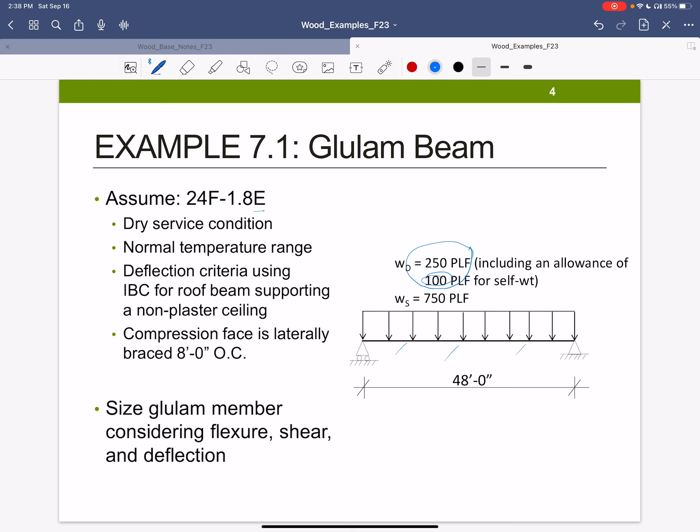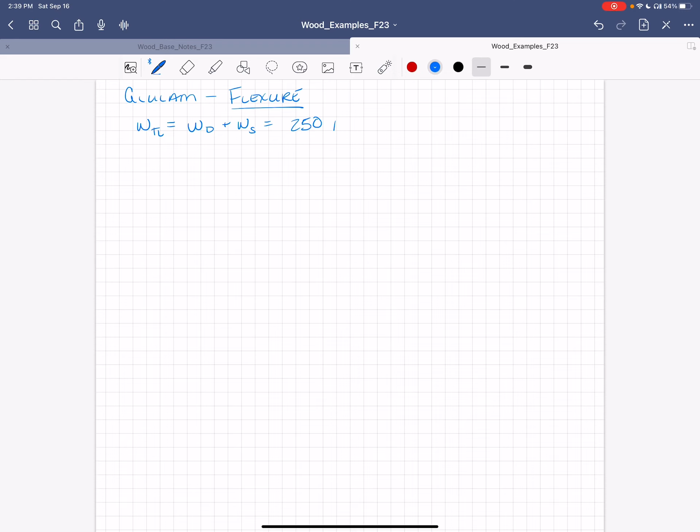So we're going to do the usual flexure, shear, and deflection, but this time we're going to use a glulam member. Oops. All right, so let's get started on this one. Glulam flexure example, and we'll look at the shear and deflection. All right, so our demand W, or W total load, is WD plus W snow, and it was 250 pounds per linear foot plus 750 pounds per linear foot for a nice round 1,000 pounds per linear foot.

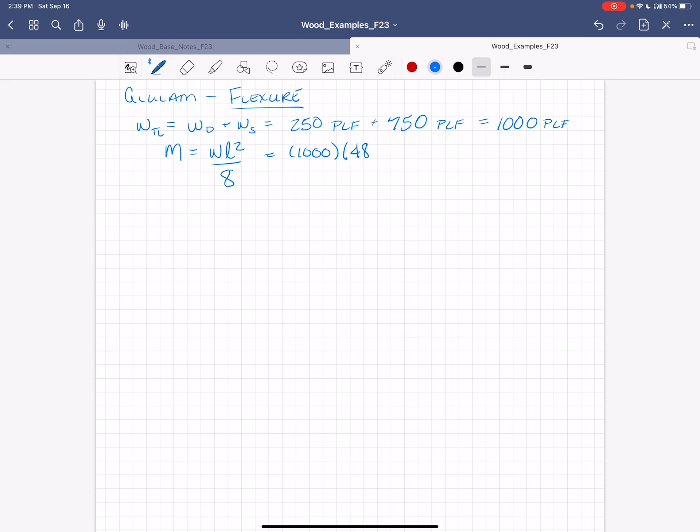Moment, the good old WL squared over 8. It's all uniform load, and it is a simply supported beam. So we'll get 1,000 pounds per linear foot, it's a 48-foot span, so a long span compared to what we've been doing, squared over 8, and we get 288 kip feet. We've been playing with pound feet in the sawn lumber, but now we're talking about a much longer span. This glulam is going to be a bunch of lumber pieces laminated together, and so we're now in kip feet. So this is looking more like some of the structural design you've done with other materials.

Okay, so f sub bx would be M over S sub X. But we don't know S sub X. We've got to choose the member size first. Right, that's the design problem here. So we know that we have to be less than what's allowed. So we're going to solve for S sub X, just like we did on the design sawn lumber problem. We'll follow the same process, but in glulams we're going to have this X piece because that designates which way the laminates are going, which way we're bending.

Same idea as before, but now we have to go to table 5.3.1 of the NDS code to find what C values we use for glulams here. In flexure, CD, CM, CT, CL, CV, CFU, C sub C, and C sub I. I missed one here. Yeah, C sub I.

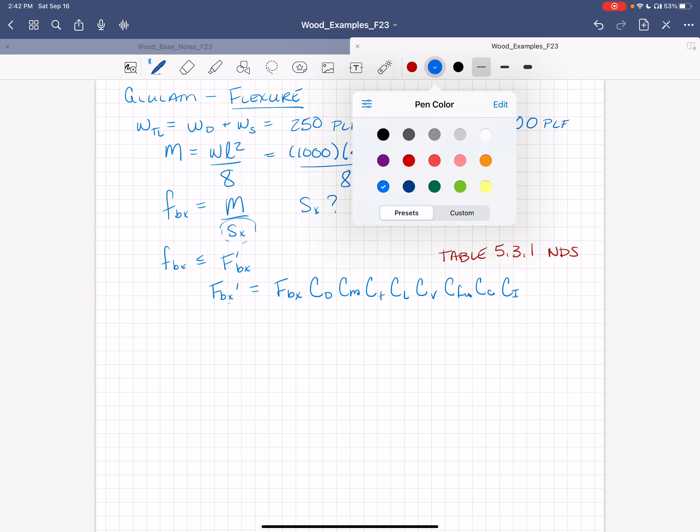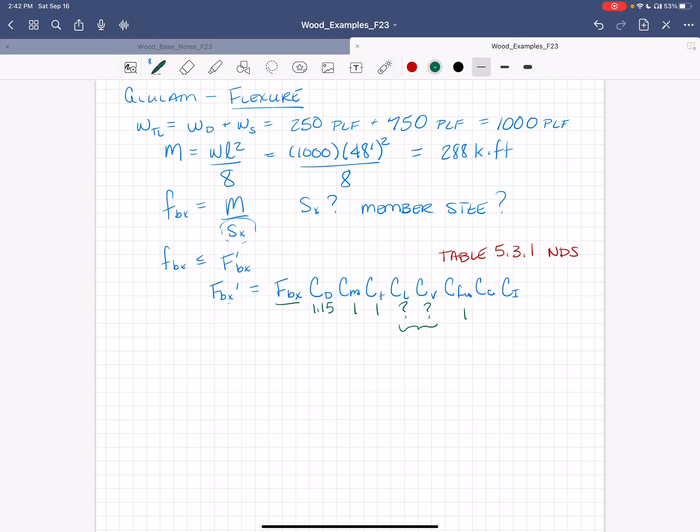All right, so if we go and look at this, I'm just going to switch up colors here. We're going to look up Fb in the table. A lot of these we've done before. C sub D is 1.15. CM is 1. CT, the temperature one, is 1. I don't know C sub L. I don't know C sub V. And remember these two, if you look in table 5.3.1, there's a footnote that says we don't apply those simultaneously. So we use the smaller of the two. We're going to have to figure out what those are and then use the smaller one. C sub fu 1, C sub c 1, C sub I 1.

All right, so what were the new ones here? Well, the ones we're going to have to deal with are C sub v, which is the volume factor. And we have C sub c, which is a curvature factor. We're not looking at curvature in this beam at all, so that's 1. C sub I is a stress interaction factor for tapering. And this means that when they make the thing, it's got a taper to it.

So we're not doing anything fancy with tapering here, so that one's also 1. All right. So what we've got to deal with is C sub L, which is the lateral stability one, and C sub V. So we use the smaller of those two guys, the lesser of those two. So how do we do this? Well, we don't know either one of them.

And this is not as straightforward, because in the sawn lumber chapter there's that 4.4.1 section that allows us to use some rules of thumb. This wasn't a case where it's continuously braced, so we don't have that out. So we've got the 8-foot on-center bracing, and we're going to have to figure out what C sub L is, and we don't know what C sub V is either, because that is a volume factor, and that means we have to know what the size of the thing is.

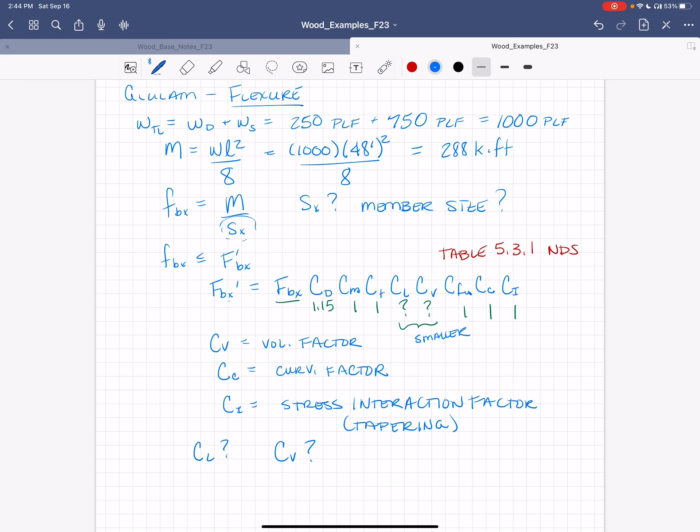So if you go in on page 37, or section 5.3.6, the volume factor is an equation, but we don't know what the member size is yet. So page 37 or 5.3.6 of the NDS has your volume factor.

And that equation is C sub V equals (21 over L, the length) to the 1 over x, times (12 over d) to the 1 over x. Sorry, I said that wrong the first time. And then (5.125 over b) to the 1 over x. So kind of messy, but not a hard equation. And the max that you can use there is 1.0.

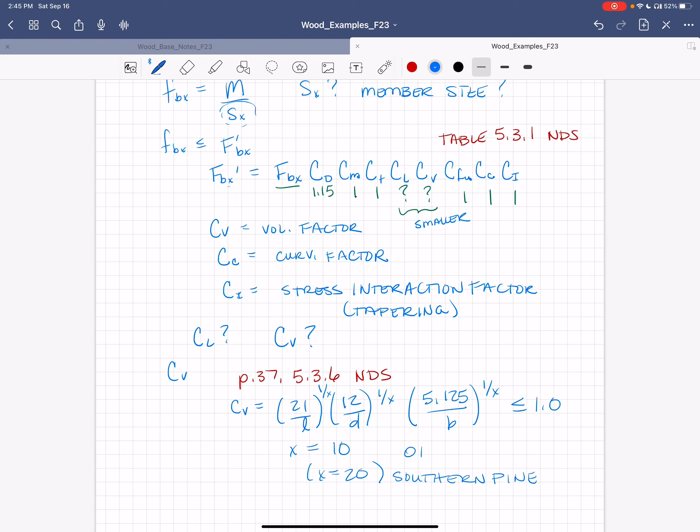In our case, x is 10. x is 20 if it's Southern Pine, and it didn't specify we had Southern Pine here for this example. Any other wood is 10. Okay, so we could make up a size. If we'd been doing a ton of glulam design in our office, we would probably have a really good idea where to start with this. My gut feel would be something around 0.8, but I went through this problem and it might look too suspicious, because the actual answer I came up with was pretty close to 0.8.

So we're going to use just a guess of C sub V based on, if you happen to have the wood book or have access to it, they do a similar problem here. And they just say, guess 0.82. Okay. Now, there's no description of why to guess 0.82. Typically, you'd have a feel for this. I would say you could throw in a dimension and see what you get. There's no good reason here that I'm guessing 0.82, other than that was the guess that was used in the example problem in the book.

You could use anything. I would say keep it between 0.75 and 1.0. It's probably a good start. And 0.8 sounded like something good to me. Anyway, this will depend. You may choose a different section size than I do, because there are several section sizes that are pretty good once we look in the glulam tables for this one. So let's just say we're going to guess this and move forward, knowing that it's just a guess and we can do whatever we want.

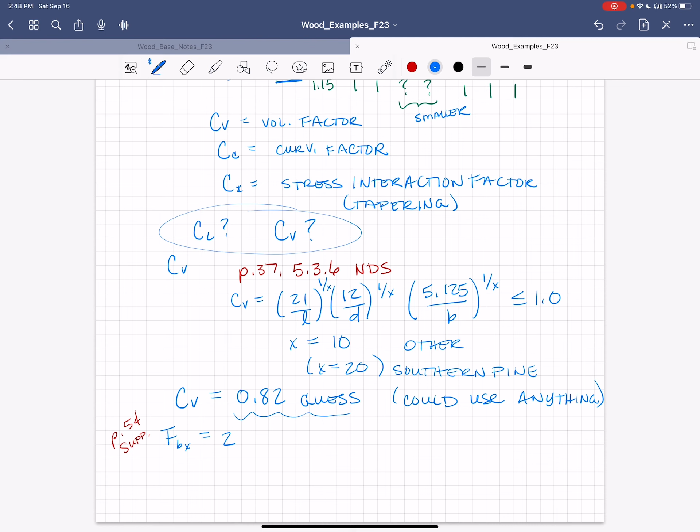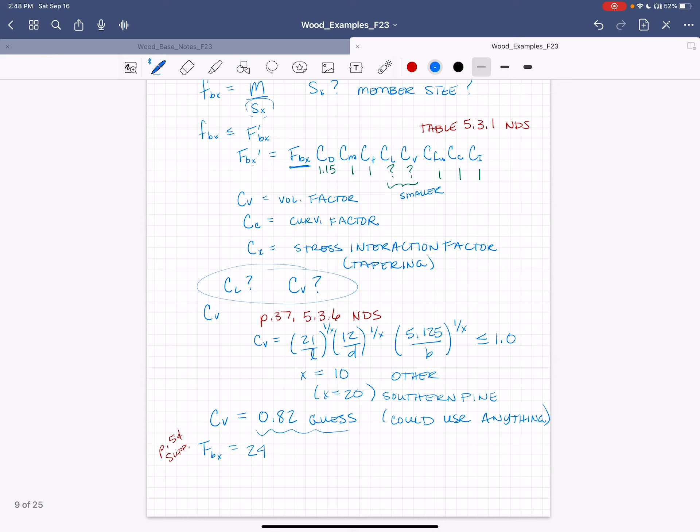F sub bx. So pause this video and go look up the things that I write in red, to make sure you see where it's coming from so it's not totally confusing. If you've got a hard copy of the NDS, I would go ahead and put your sticky tabs or whatever you want in there so that you can find this stuff easily. Okay. If I look this up, for the glulam beam that I was given, which was a 24F-1.8E, we know the 24F means it's 2400 psi, so I don't actually have to look that part up. But you can, and it'll show you in the table that that's what it is.

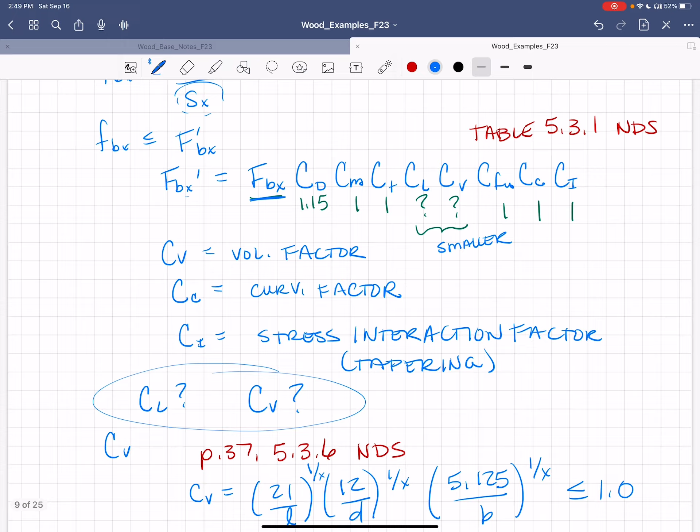Okay, let's go ahead and put in all the different C factors and get an answer here. So 1.15, 1, 1. We don't know yet what some of the other ones are. Let's put in this with 0.82. You remember when we were up here, basically everything is 1. We had a 1.15 here, and then we had our other guys. And the last three were also 1s. All right.

You don't have to put all the 1s in for your calculations. It does help to do that just as a double check so you don't drop one accidentally, especially if you're doing a problem with wood on, say, your licensing exam. That's where you will miss points. So make sure that you're catching all those C values. It's very, very easy to miss one of those.

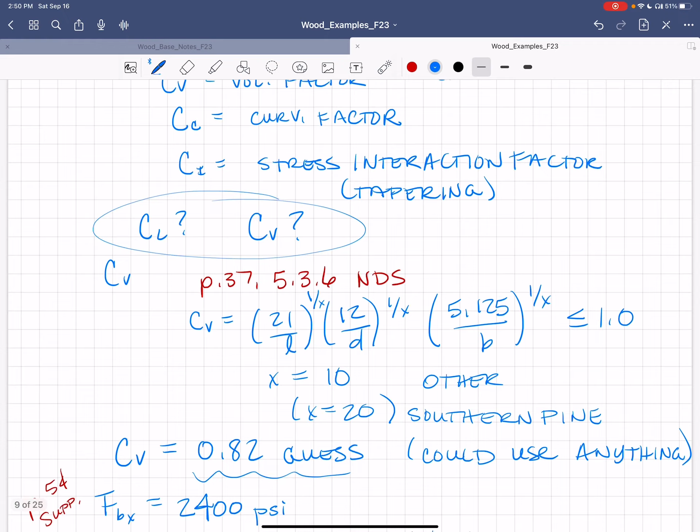So we need to find our little f sub b. 288 kip-feet is the moment, 12 inches per foot, 1,000 pounds per kip, and then I have S sub x. And the F sub B stress that I'll get here is, sorry, needed to write this down. I was talking so much, I forgot to write it down. 2263 psi is what we got for the F sub Bx times the C values. There we go. So we're going to take that equal to 2263.

So our stress equals moment over Sx so that we can find S sub x. Solve for S sub x and we get 1527 inches to the third. Now remember, this is just an estimate at this point because we assumed a CV value, and we haven't even found a C sub L value yet because we have to see what we get for section size and then check all those things. So at this point, go to table 1C, which are the section properties for the glulams, and take a look at a couple sections.

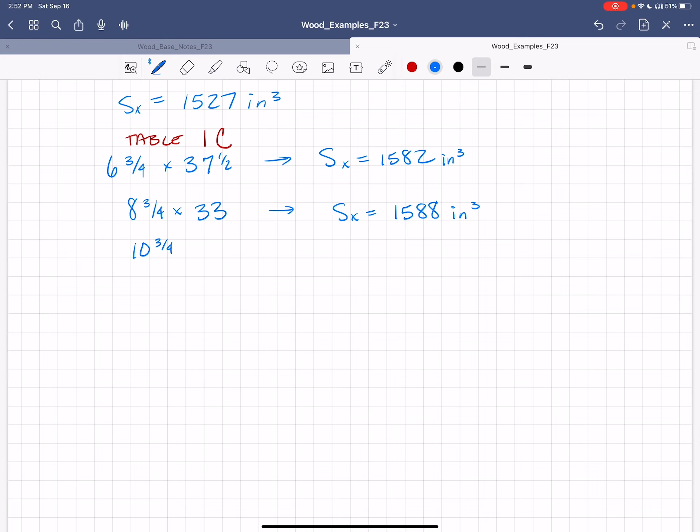So I'm just going to pull a couple out that would be at least 1527 for an Sx value. One is a 6 3/4 by 37.5, and that will give me an S value of 1582. There's an 8 3/4 by 33, and that one gives me 1588. Another one's 10 3/4 by 30, and that one gives me 1613 inches to the third.

Now, generally, I've got a little wiggle room here. I would try to get the lightest one. In this case, that's this one. It's not lightest because the S sub x is lightest, although that's true in this case too. It has the smallest area. The areas: this one's about 253, this one's about 289, and this one was about 323-ish. So the smallest one, right?

Because S is I over Y. And remember, depending on my shape and how far stuff is from the neutral axis, I could have an I value that's bigger with a smaller area. I just put this over here to remind you that's what is going on. These are all rectangular sections, so as long as I'm using basically the same kind of wood through the laminates, I would probably just go with the smallest S sub x value in this case. Doesn't really matter. Use one of the ones. We're gonna use this guy.

So if I try a 6 3/4 by 37.5 glulam, now we need to find actual C sub V, C sub L, and figure out which one's the smaller to control. Then we're going to be able to check flexure. So C sub V, we're going to use that equation now. 21 over L, 48, to the 1/10, 12 over 37.5 to the 1/10, and 5.125, this is the formula from the previous page, over 6.75. So now I have the dimensions to put in here, and I get

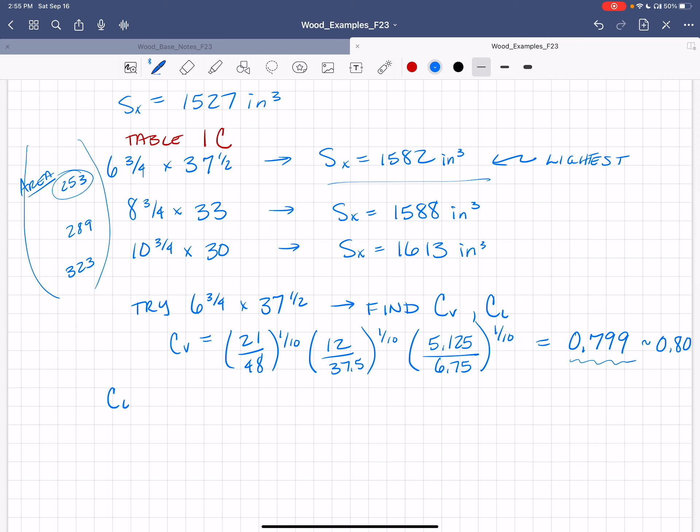But we don't necessarily know that that one controls, because now we have to calculate CL so that we can find out which one's smaller. Okay, CV is, or CL, sorry, the lateral bracing one for the glulam is not just one. This thing is not continuously braced, and it's braced only at 8 foot on center on the compression side. What we're going to have to do is use the formula from this section.

So go take a look at NDS, the code, 3.3.3, page 15 of the code, and just take a look at that whole section, because there's a number of formulas there. Let me look at that section real quick in my book too. Okay, so it says beam stability factor.

I have a hard time with the wood code when I haven't used it in a while, because in my brain, the commentary is the right-hand column. Remember, the commentary is in the back of the NDS, and all the columns are the code when you're up in the front of the NDS. So on the right column, you've got 3.3.3 beam stability factor. We don't have any of the simple cases here.

So what we need to do, if you turn the page, you'll see effective lengths. And our effective length, L sub E, we've got a single span uniformly distributed load. So we either use 2.06 times L sub U, or we use another factor. So if LU over D is less than 7, then we use 2.06 L sub U.

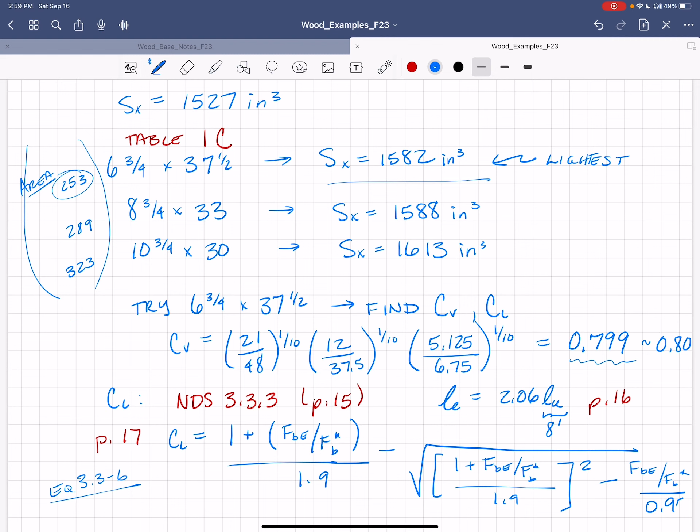Okay, sorry. So this same quantity, and this is raised to the 2, or in other words, squared, minus that same ratio over 0.95. Okay, so there's that equation. We got to figure out what these different things are.

In that same section, it tells you what F sub BE is. It's F sub little b capital E for modulus, basically, equals 1.2 times E prime min over R sub B squared. All right, so this gets a little cumbersome in here, but this is all in that same section, and you're just trying to find each of the values.

The E sub prime min, if you remember, we were talking about the E values when I went through the slides on the last lecture for this section on glulams. We use E sub min when we're looking at lateral stability, so that's why we use this one, and we're going to use E sub Y min, because this lateral stability is bending weak axis. Let me just show you that.

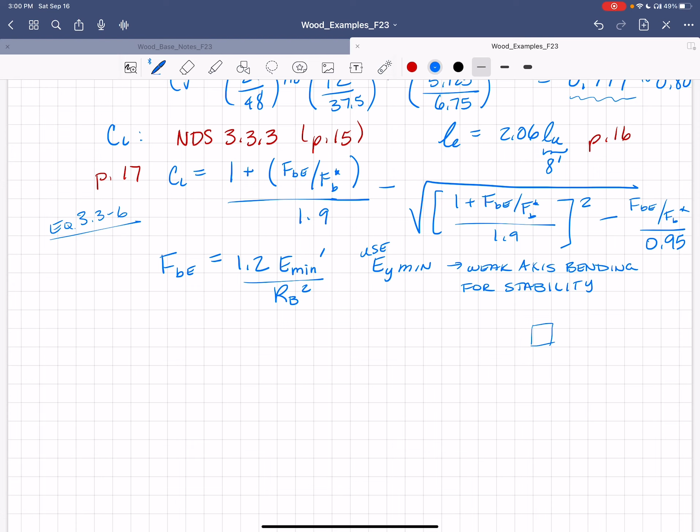This is when, if we were in class, I would get out the white I-beam that I carry around everywhere and bend it. But essentially, if this is my beam, right? If I look sideways at my beam, the normal bending that we're doing is this way, right? And we're bending about the strong axis. So it's up and down, right?

This way. When I'm talking about lateral stability, that's when it bends out of the bending plane. So that's the weak axis bending, right? Because that's the whole problem. If it's in strong axis bending, we're in good shape. If it starts to buckle out of plane, that's when things totally change, right? It's the same as in steel class. If you haven't had steel design yet, you'll do some similar stuff to this for steel design.

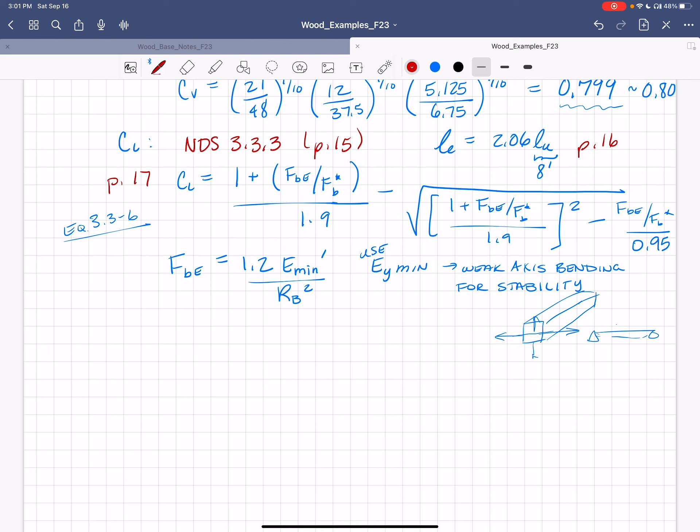All right, so that's what EY value we're going to use. So EY min, you want to go to the supplement table 5A. EY prime min is EY min. You look up, find C sub M, C sub T, both of those are 1 for our case. You look that up in the table, 850,000 psi for EY min.

It's a much smaller E value than we use when we're not in the stability piece here. So EY min is 1 times 1, so it's just 850,000. We're just using this E value for this specific calculation. All right, so now back to section 3.3, in this case 3.3.3, equation 3.3-5 is the equation for capital R sub B.

Okay, that's the slenderness ratio, R sub B, very similar to steel. If you've only had concrete design, you won't have dealt with slenderness ratios really, because it's kind of an upper level topic. In most concrete, we don't have to worry about buckling out of plane. That's not a thing because the members are so heavy and stiff. But in steel you will.

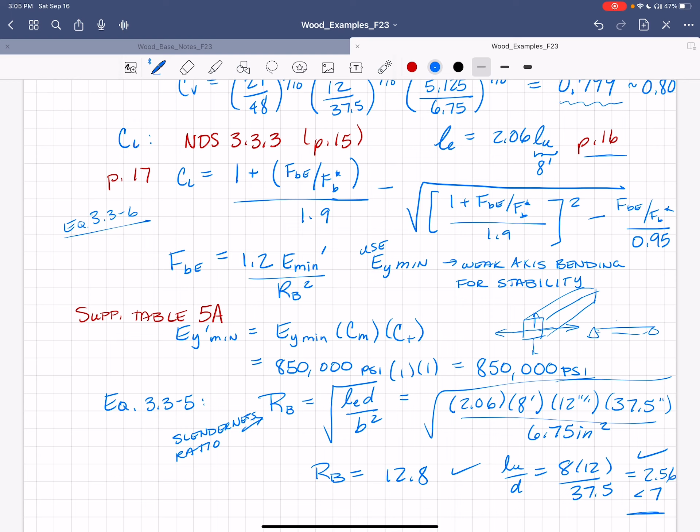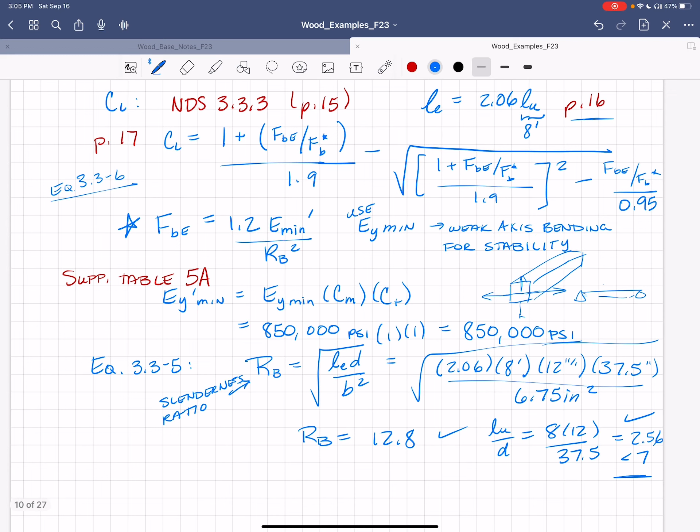Now let's go in and do this calculation, F sub BE. F little b capital E is 1.2 times EY min over R sub B squared. I'll write that down for you over here. Yeah, so that equals 6226 psi. So we're getting there.

Oops. Sorry. I'm dropping my pages here. I apologize.

And let's go ahead and calculate F sub B star, which is another one we need for that equation, which is F sub B times C sub D, C sub M, C sub T, C sub C, C sub I. FB star is the reference bending design value multiplied by all applicable adjustment factors except for C sub FU, C sub V, and C sub L. That is in the same section, section 3.3.3, where the equation we're going to use has the definition for F star sub B.

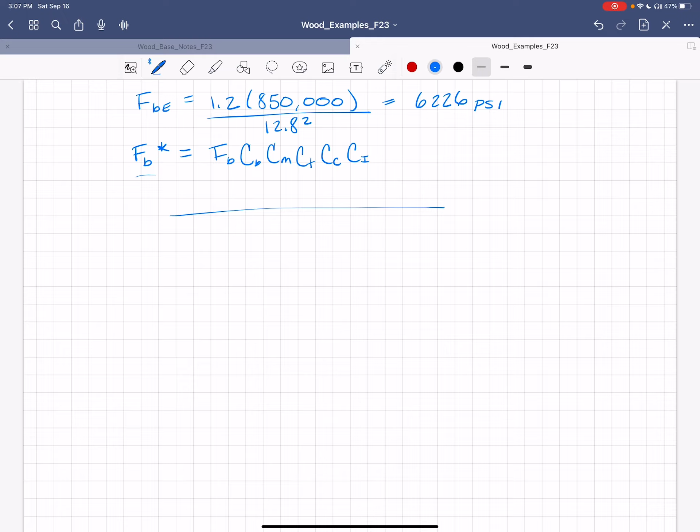I'm going to pause here for a minute because this video is going to get long if I take it all the way to shear. So we're just going to have a pause. This is a good time to go check the different tables. Then I'm going to pick up in a new video, and we'll start out there going through and doing this longer calculation to finally get C sub L.